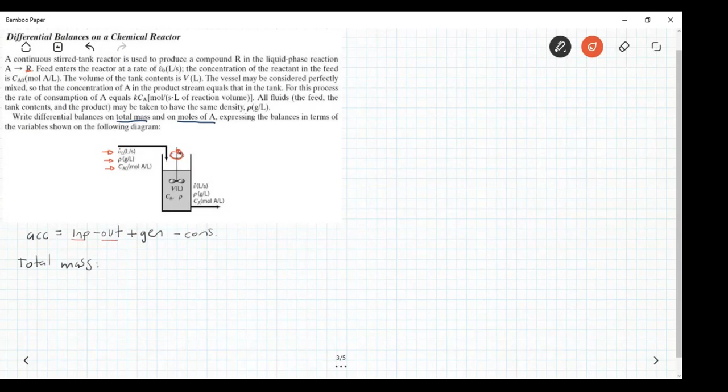So we're going to pay attention first to the total mass. In the total mass, you're going to find that, of course, there is an input because we have a volumetric flow in the inlet, and we have an outlet with a volumetric flow. So these two, we know that we have them. But can the total mass be generated? The total mass is conserved.

So the term of generation is not going to appear in the total mass balance. So we cross that one. And consumption, again, mass should be constant, so we're not going to have consumption. So we cross that one too. So if we do that, our equation is just that accumulation is equal to the input minus the output. And that's it, right? Okay.

Professor, yes. Why wasn't there consumption in the system? Right now, because we're paying attention to the total mass of it, right? And total mass, okay, A is going to react to form R, but the total mass is not going to change, right? The number of atoms in that system is not going to change at all, right? Right. So that one. Thank you.

You're welcome. Okay, so the first thing to do is to write the mass. How can we interpret the mass in the system, the total mass inside of the reactor, as a mass, right? So M. M is the mass, and should be in, let's say, grams, or any other unit that you want of mass.

And that one, with the variables that we have on the diagram, if you pay attention, we have the volume of the tank, we have the concentration of A and the density of all the solution that is on the tank. So the concentration of A, of course, doesn't matter for the total mass, but the volume of the tank and the density can give us the mass. If we have the volume that is in liters, we multiply it by the density that is in grams per liter, and with that we obtain the mass, right?

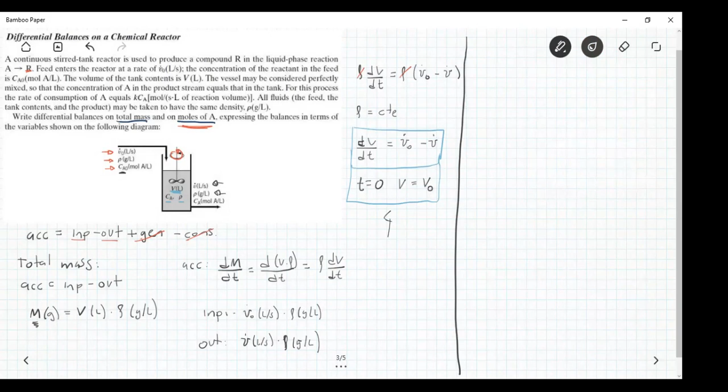Okay, so we're going to do the same exact thing to obtain the balance on the moles of A, right? So we begin with our initial equation for this kind of system. Accumulation is equal to input minus output plus generation minus consumption. And we have to see which of these terms stay if we have the balance on the moles of A.

So we have an input of moles of A? Well, yes, right? We have a concentration in the inlet, initial concentration of A. So yes, we have an input. An output, well, yes, some of A is not going to react completely. So we're going to have a concentration that should be lower than the initial, of course, but we're going to have an output. Then a generation. Well, we have a reaction where A reacts to form R, right? That's over here.

So a generation, no, we don't generate A, right? It's a reagent, so it's going to be consumed. So generation we don't have, and consumption, as I just said, you're going to consume some of A because you have a reaction. So we have those three terms. And again, we need to start with either the mass or the number of moles of A in the reactor. So I'm going to start with the number of moles because it's what the problem is asking.

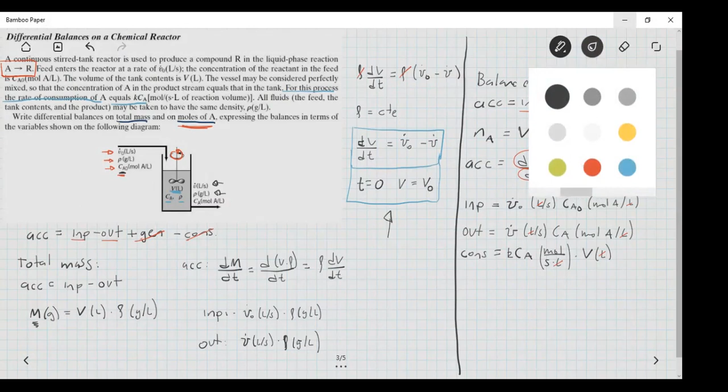And the only thing that we have to do now is to plug in everything into our initial equation that is over here. Accumulation is equal to input minus output minus consumption, right? So we do just that.

We have the change of volume times the concentration over time, the accumulation, is going to be equal to the volumetric flow in the inlet times the initial concentration of A, minus the output, that is the volumetric flow at the outlet times the concentration of A in the reactor, and minus the rate constant times concentration of A times volume, right? And that's it. This is our equation, right?

And now we have a differential equation, and the only thing we're missing is, of course, the boundary condition. So the boundary condition for this system: at the beginning, before we turn on the reactor, it will have some volume of A. We're going to have a concentration inside that is the initial concentration, CA0, because that's at the beginning, before any reaction happens. So at T0, CA is equal to CA0, right?

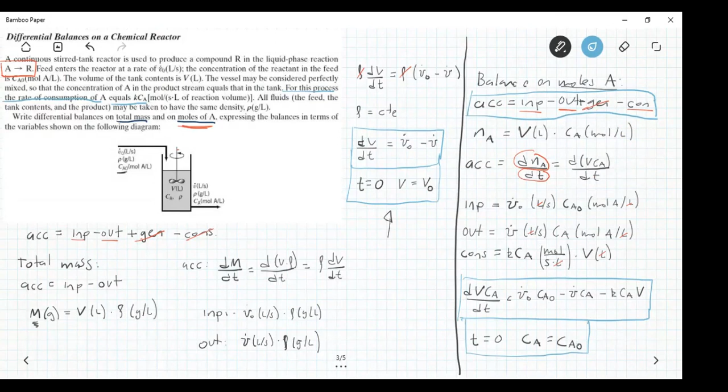No. Okay. So that is the differential part of the balance. But as I told you, we have an integral part, an integral balance. In the integral balance, what we have to do is to solve that equation. And to solve a differential equation, most often what we do is to separate variables, and with those variables separated, we can integrate over those, right?

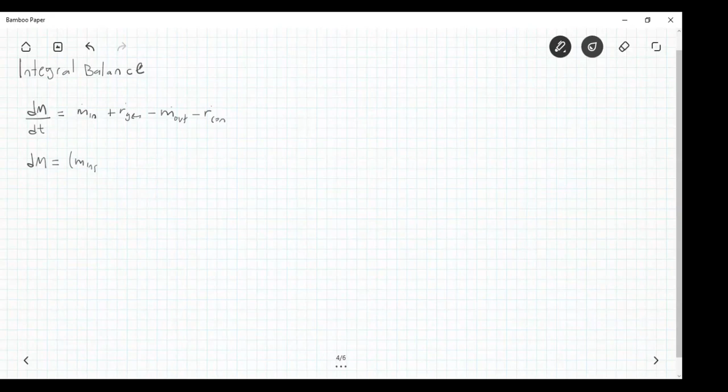So if we start with our general equation, we can rewrite this equation as dm, differential of m, is going to be equal to all that here, that depends on time, right? And of course we can solve that one by integrating. So we're going to have the integral of the differential of m, from m0 to mf, from t0 to tf.

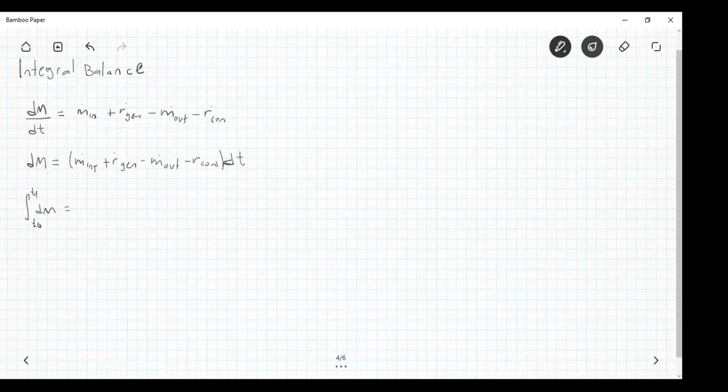So this would be the mass at the final time minus the mass at the initial time, right? And this would be equal to all those terms integrated over time: the integral from T0 to Tf of the input dt, plus T0 to Tf of the generation dt, minus the integral from T0 to TF of the outlet, the mass that gets out, dt, and minus the integral from T0 to TF of the consumption dt.

So if we have all those terms, we can reach a numerical result, or we can do it analytically. If we solve any equations by separation of variables and integrating, we can obtain the change in mass, or how the mass behaves over time. That's the interest of this kind of balances. Again, I think it's easier if we do an example. Let me read the next problem. I will ask you to do something, and then I will finish the resolution of this problem.

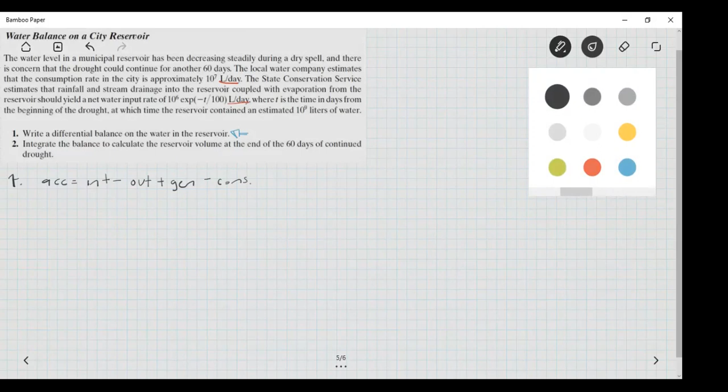So here it says that the consumption rate in the city is approximately 10 to the 7th liter per day, right? So we can use that value for two different things, either for a consumption or for an outlet. Either way is going to be the same thing. So because mass is conserved, I'm going to put it as an output. So we don't have consumption of water; we're going to have an outlet from that reservoir. And then the generation. Water is not going to be generated, because you have a constant mass of the system. So generation goes, and we will only have the input and the output.

Okay. So the accumulation, again, we have to start with the mass, right? So the mass of the reservoir is going to be the density of the water times the volume of that reservoir. And then we can obtain the change in mass over time, equal to the change of the density times the volume over time, right? And then we have to find the two terms.

So the input: it says that the reservoir should yield a net water input rate of 10 to the exponent of blah blah blah, right? So input is equal to 10 to the sixth e to the minus t over 100. That is our input, and the output is just this value over here. It says that the rate of consumption is approximately 10 to the 7th liter per day, so we have that 10 to the 7.

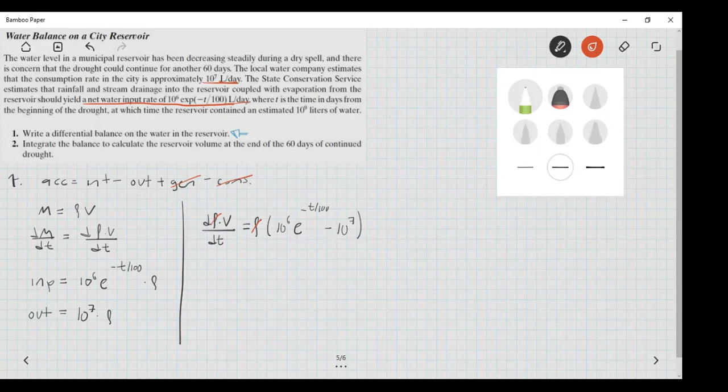Okay, so we end up with that differential equation, and then of course we have to express this with a boundary condition. So at time zero, at the beginning of the drought, the reservoir contained an estimate of 10 to the 9 liters of water, right? So that is our initial condition. So the volume at T0 will be 10 to the 9 liters. Okay. And then we have it, right?

That is the first part of this problem: to obtain the differential equation and a boundary condition. Okay, so now we have to just integrate the balance to calculate the reservoir volume at the end of those 60 days, right? It's giving us a time frame of continuous drought. So now what we have to do is solve this equation doing the separation of the variables, right? So let's do that.

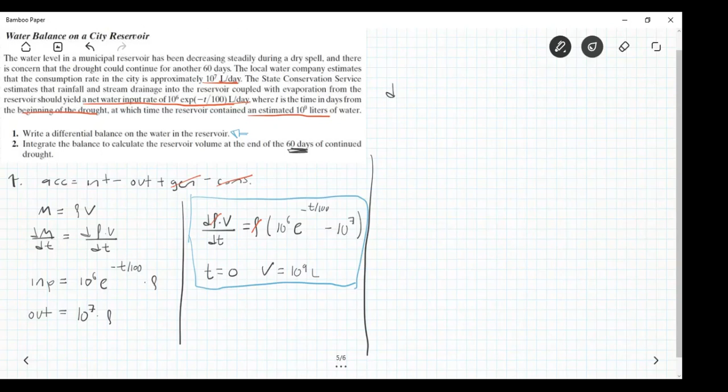If we separate the variables of this problem, we obtain that dV is equal to 10 to the sixth e to the minus t over 100 minus 10 to the seventh, times the differential time, right? But we know the time frame that we want: from the beginning of the drought to 60 days. And we know that all the conditions are per day, so we can integrate over that time frame.

So the integral of the volume from V0 to V60, so V at 60 days, would be equal to the integral from t0 to 60 days of both parts of this equation, over t from 0 to 60, minus 10 to the 7 dt, right? So the first part of this equation is pretty easily converted. It's just the volume at 60 days minus the volume at the beginning of the drought, and would be equal to the differential equation, right?

Can you go back a little bit and wait? Yes, please. Of course. Thank you. You're welcome.

Okay, so now let's get to the part of this problem where we put everything together. So the volume at 60 days is the one that we are interested in. Let me do something over here. V at the 60th day is going to be equal to the volume that we have at the beginning, so 10 to the 9, minus 10 to the 6 times 10 to the 2 times e to the minus t over 100, evaluated from 0 to 60 days, and minus 10 to the 7 t evaluated from 0 to 60. That's it, right? Then we have to substitute the values for each part.

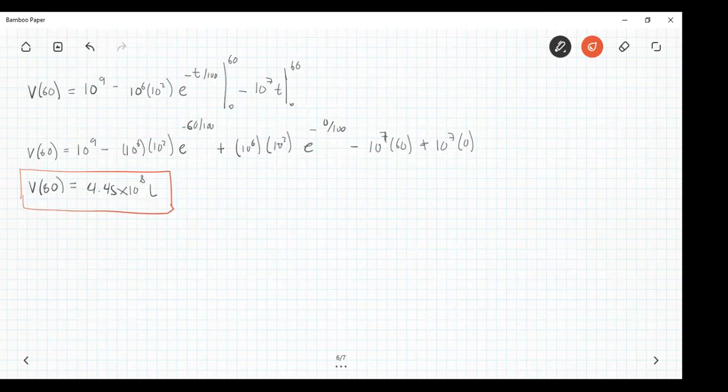So any questions for this problem? How I solved it at any point? I have a question, teacher. Yes. Why, in the previous page, do we multiply the input and the output by the density? Because if not, you're not going to have a mass, right? What you need is a mass balance, right?

So if you only have the numbers 10 to the 7, for example, 10 to the 7 is liters per day, right? In that case, you don't have a mass. You need to obtain a mass because we're doing a mass balance. That's why we started with mass. You need to multiply by the density of the fluid to obtain the mass of that fluid, of that volume, right? That's why.

You could start with volume, and you're not going to need these densities, right? But that would be incorrect because you're doing a mass balance, not a volume balance. So the equation that you obtain at the end could be in volume or in many other variables, but at the beginning you have to start with the mass. Okay, teacher. Thank you. You're welcome.

So the steps are, as I told you, for a continuous mass balance. For transient mass balance, you have to do a couple of steps every time to ensure that you're doing it correctly, right? The first one is to write down the equation that we have over here: accumulation is equal to the input minus the output plus the generation minus the consumption, and see what terms of that equation you're going to have for that particular problem. So this is step 1, right?

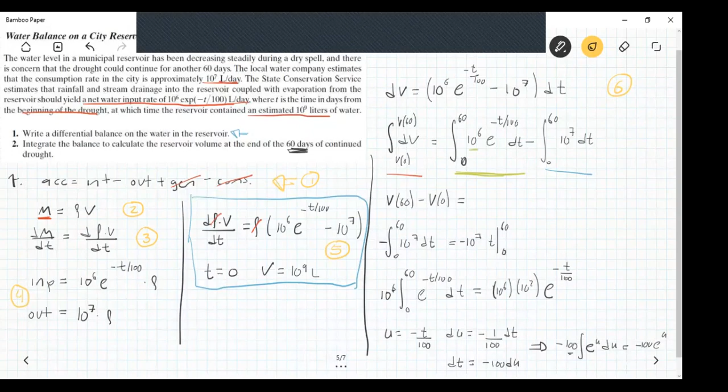Okay, so the last part of today's class is going to be a brief activity. You can do it individually. It's already on Blackboard, and it has to do with these transient mass balances. The part that I'm most interested in is the last part. Let me see if I have it here. So if you go to Blackboard, please, and go to activities, you're going to find an activity called transient balances. Okay, so let me share it with you.

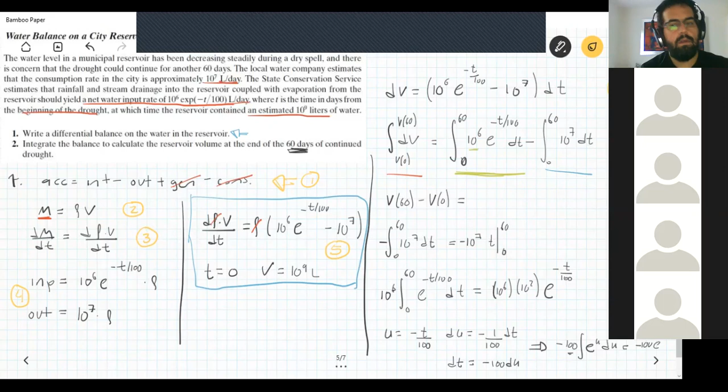Okay, so please go to Blackboard and start opening the document. What was your question about this last part?

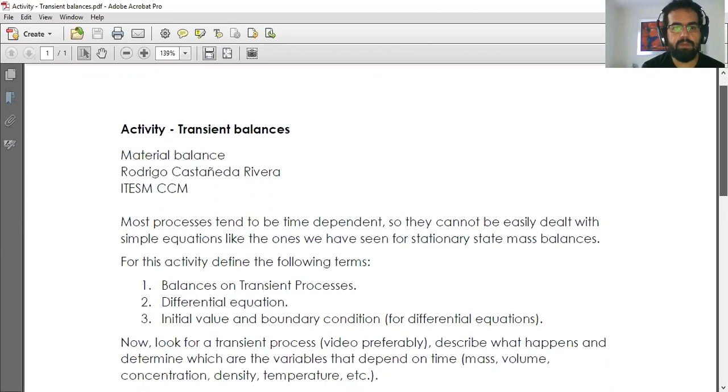Sorry, guys, I lost my connection for a second. Can you hear me okay again?

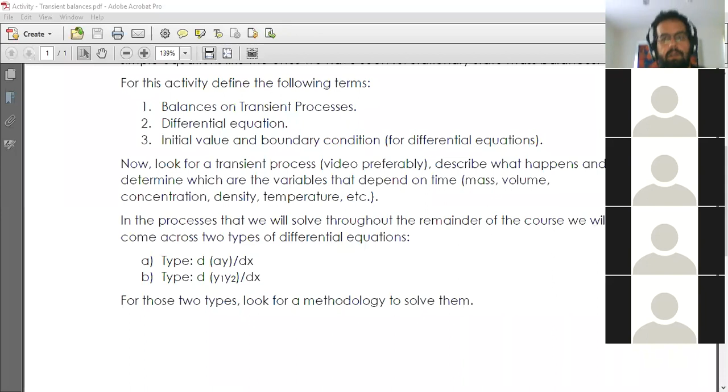Yes. Okay, so as I was telling you, this is the activity. It's in Blackboard already. So the first part is to define the terms balances on transient processes, differential equations, initial value and boundary condition for differential equations, of course. That is the first part.

Then you have to look for a video or for a process, and you have to describe what happens, what you want to determine, and which are the variables that depend on time. So, for example, whatever you want, as long as it's a process that depends on time, and you have to determine which of the variables depend on time, so the mass, volume, concentration, density, temperature, and so on, right?

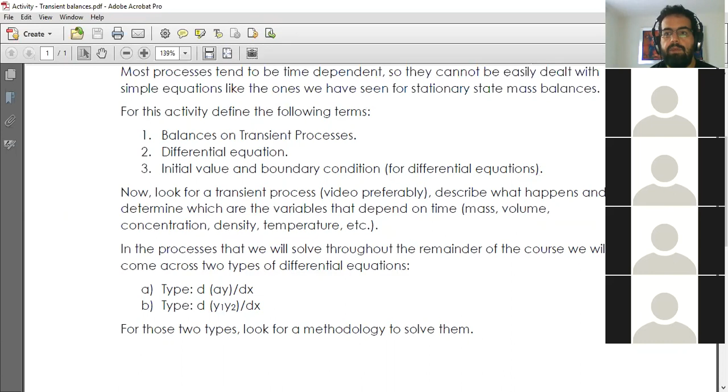So in the activity that you upload to Blackboard, please add the link to the YouTube video or wherever you found the information, so I can see it and see if you are correct about the variables that change. Okay.

Then, in the types of problems that we're going to solve, we're going to find two different types of differential equations. One is the type of differential of a constant times variables that depend on x, or also on time. And the second type is two variables, y1 and y2, that depend on x in the differential equation. Okay, so for these two types of differential equations, you have to find a methodology to solve them.

Okay, and that's it. You find that information, you load that file to Blackboard today. That's pretty much it, right? On Thursday, there is our last class. We're going to do a couple of different problems about transient balances, and if I have time, I will give you a brief course of mass balance of all the course. Okay, I hope I have the time for that.

If not, maybe I will record it on video and then upload it so you can see it. Right? It will be like a brief class on all the things that you should know about mass balance. Okay. Do you have any questions about the activity or anything else?